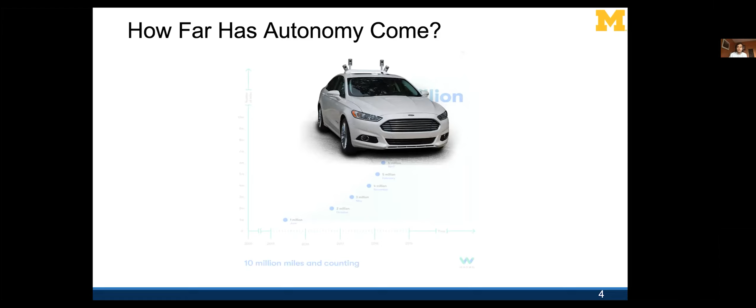And really, the goal of this talk is to develop sort of control mechanisms or an idea of how to control these systems that doesn't just work for autonomous vehicles, but can generalize across a bunch of different systems like walking robots or quadrotors or an arm robot.

And to try to understand just why this problem is difficult, that is controlling these types of systems, one way to think about it is thinking about how a researcher or even someone like Waymo thinks about doing planning and control for these types of systems. So one way to visualize that is, I have my car here, and we'll sort of see this picture maybe over and over as we go along the talk. We have our car here, and we may have an obstacle.

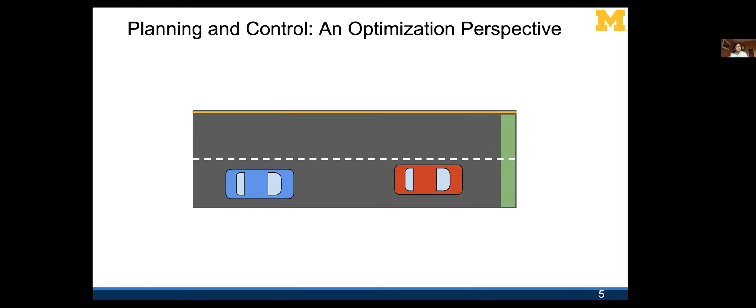And if we wanted to try to do receding horizon real-time control for this blue car here, well, the way that this is typically done is that people discretize time and they generate a trajectory by using some type of optimization, which discretizes time and then uses a discretized dynamics while doing optimization in order to generate a safe trajectory. And the challenge here is that may generate a trajectory like this. And the question is, does that actually represent reality?

And so there's some fundamental trade-off between model accuracy or optimization fidelity versus what we're able to realize in reality. And that trade-off is something that as autonomous vehicle engineers or as roboticists controlling general systems, we're uncomfortable with, and we want to see if we can develop a way to overcome that challenge.

Typically, sitting on top of all of this is the challenge of model fidelity. So, in addition to representing the dynamics of the vehicle with a high quality discretization, we also have challenges associated with, for example, in the vehicle context, representing friction or representing different types of scenarios and having a model of the vehicle itself that is accurate.

And so what this talk is really going to be about is trying to address this triumvirate of challenges by using infinite dimensional representations. And what this is going to do is allow us to transform nonlinear models into linear ones. And the challenge, at least in this talk, that we're going to try to address is how we can utilize these linear models in infinite dimensions in a way that is actually accessible to doing real-time planning without sacrificing performance or safety.

And the first portion of this talk is going to be some work that we've done recently that's called Reachability-based Trajectory Design. And it can make a nice trade-off between performance and safety where we don't have to sacrifice either of those things while being able to do real-time planning. And that's going to allow us to do autonomous control of a bunch of different systems.

And on the other side, we're going to talk about some work that we've done in the soft robot world, which is using another type of infinite dimensional representation of dynamics that's based on the Koopman operator. And that's going to allow us to control soft robots and actually allow us to do things that people in the literature haven't been able to do with soft robots to date.

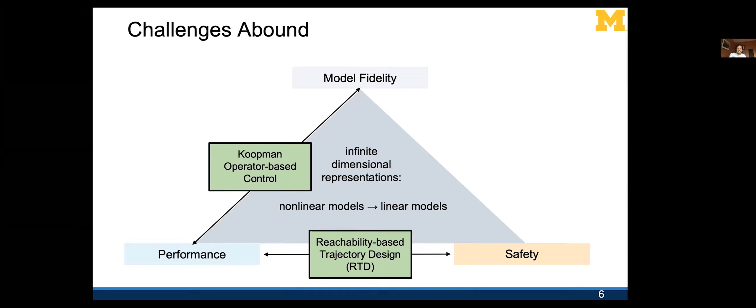And so it'll turn out, and as I warned Sam, I have a lot of slides. Chances are I won't be able to get through all of them, and I apologize in advance.

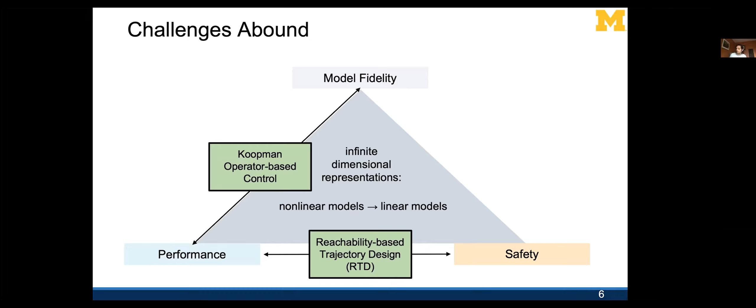So I thought I would just front load the talk with a few videos illustrating how these different algorithms work. So the first portion of my talk is going to be about this RTD algorithm. So let me walk you through how that looks on a bunch of different examples. So we're going to see these videos a few times here.

So on the left-hand side, you're going to see a robot planning view, bottom camera on the robot. On the right, you're going to see a real-world scenario. And this is in my lab when we used to have a lab before COVID. And on the left, what you're going to see is a bunch of waypoints that are essentially generated by some high-level planner. And we're going to have these obstacles, which are represented or detected by the vehicle at runtime using a planar LiDAR, that are being drawn in red. Our robot's footprint is going to be in blue.

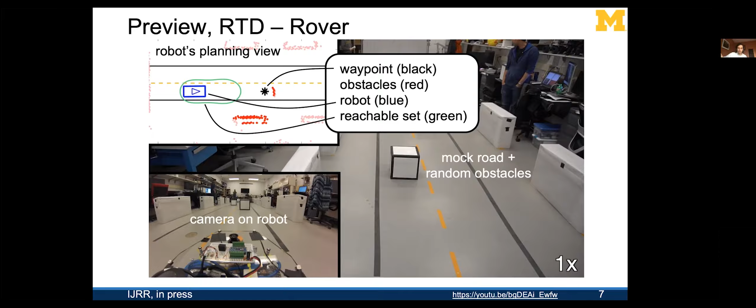And we're going to generate these reachable sets that are going to be control parameterized. And they're going to be basically selected at runtime. And we're actually going to be doing optimization to select that reachable set at runtime in order to reach that waypoint. And I'll describe how that algorithm works as we go through the talk. But this is what it looks like, at least while running on our robot here. And again, if you'd like the sort of unfiltered video with it moving nicely, go ahead and take a look at that YouTube link down there.

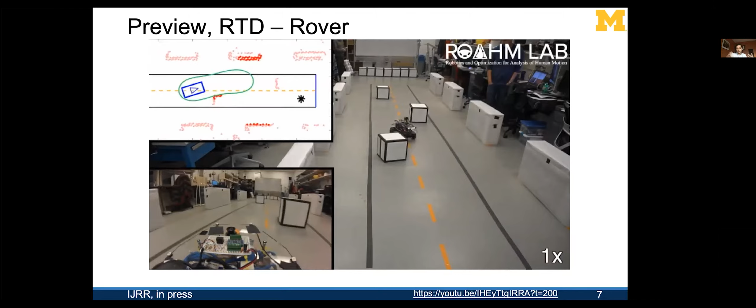But the cool thing here is that it's all happening on board the platform. It's all happening in a receding horizon way, and it can deal with these types of environmental situations without any difficulty. The interesting thing is we've actually extended this work to a bunch of different platforms. So this is a collaboration with the University of Sydney, where we're essentially running a taxi service for them.

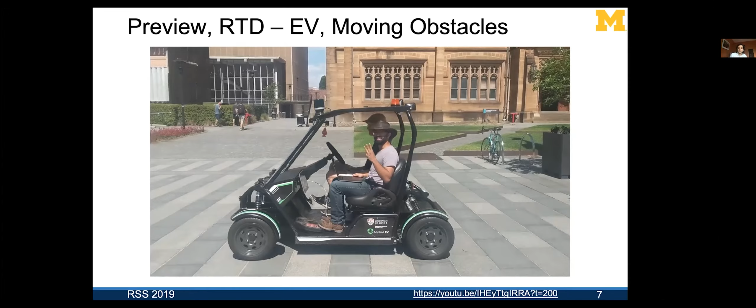And here we have our vehicle platform. It's an electric vehicle platform that's operating on their campus. And it's actually going from point A to point B and actually avoiding people and doing real-time planning here. And we can say nice things about the safety of this platform. Again, you can check out the YouTube link down here.

The cool thing is this algorithm doesn't just work for these vehicle platforms. It can actually work for quadrotors. And that's actually what I'm going to show next. Ooh. And here we go. So there's a quadrotor. And again, this is now doing this type of trajectory design. You'll see the quadrotor in a second.

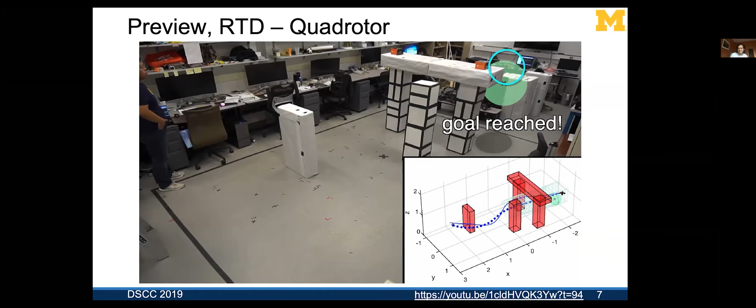It's over here. And you're going to see us doing the optimization on board that quadrotor platform in real time. Can't go much faster than about 1 meter per second in this space because of the size of the lab. But you're going to be able to see fun things happening here where we can even accommodate things like moving obstacles. And I'll jump to the end to show what that looks like here. In this instance, we're just receiving predictions of what pedestrians are doing, but we can accommodate those predictions and still say something about the safety of this quadrotor.

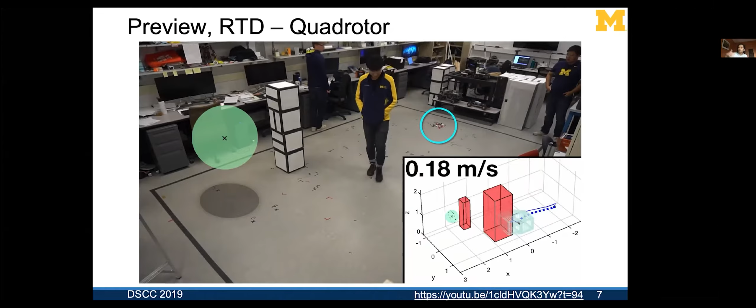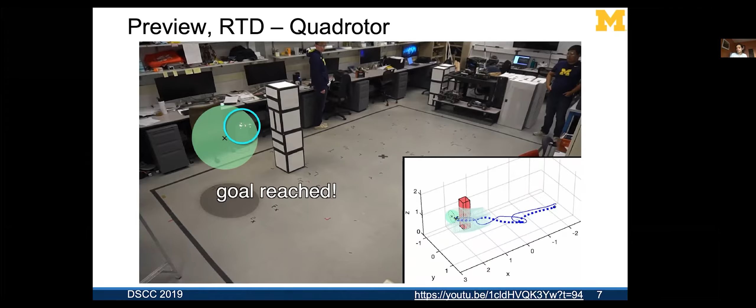And again, it's doing receding horizon planning with an optimization algorithm running on board the platform where we can say something about the safety of this platform. And it can accommodate things like aerodynamic effects, et cetera, inside of its reachable set while doing planning. The cool thing is when most people see this kind of reachable set stuff, they say, well, look, this works really well for low dimensional models. What about more realistic models?

Here's an example of us doing the same type of thing with a 7DOF arm. So this is a 14-dimensional state space model. We're generating, in this context, reachable sets that are constructed online. And actually, this is going to be what I'll speak about most of the talk. And again, we're doing planning through these really complicated scenarios for manipulators because these obstacles are very thin, which tends to be a problem for most optimization-based control design algorithms.

The cool thing is, and hopefully we'll see it, this can, again, do receding horizon planning. It's a dynamic obstacle that's just detected at runtime. And you'll see that we're able to nicely avoid that. And the amazing thing is that the same strategy extends to even higher dimensional robots.

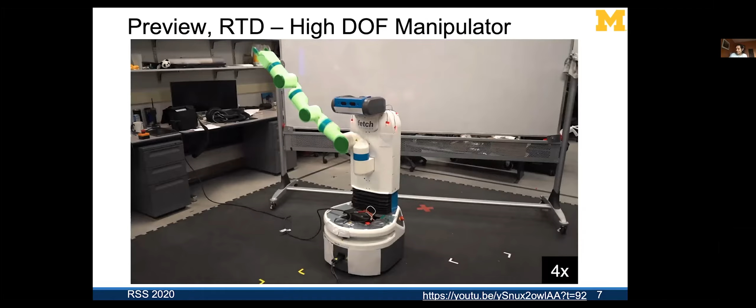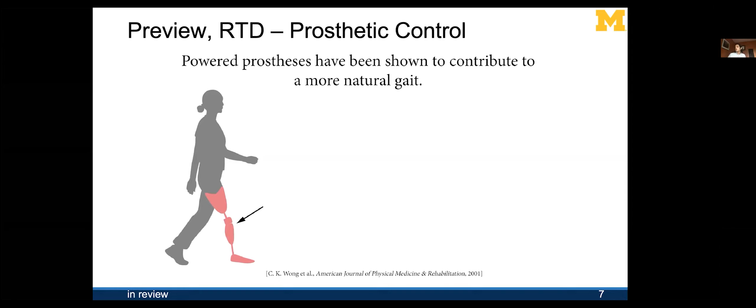Can you guys hear the volume here or no? Sam, yes, no, okay.

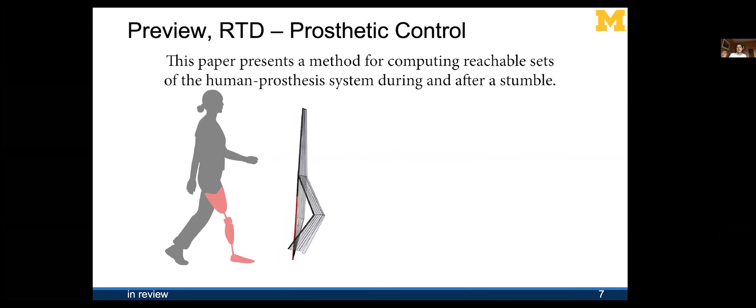So what this work is doing is actually doing prosthetic control, but now we have a set of predictions of what a human is going to do after a stumble occurs. And we can take that entire set of predictions and actually generate an input for the prosthetic that can accommodate that set of behaviors and still ensure the safety of the prosthetic and the intact human side while doing real-time planning by using a reachable set. So that'll be the first portion of my talk.

The second portion of my talk will be about this sort of Koopman-based control. And in fact, that Koopman-based control has allowed us to do really cool stuff with manipulation-based control. And this is a data-driven method. And the really amazing thing is that this is the first example of a soft pick-and-place robot that can actually pick stuff up, figure out its weight, and actually place it into the right bin. And it turns out that we're doing, again, all the control, everything online for this platform.

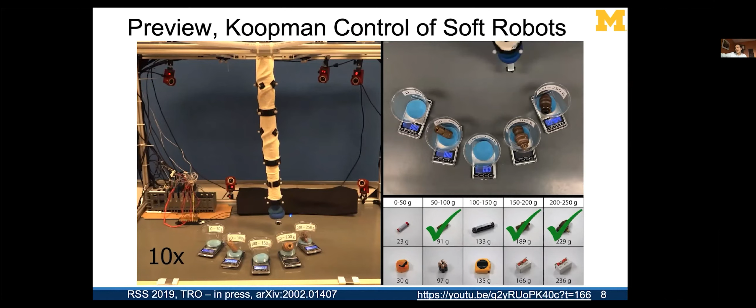And it's essentially figuring out what the weight of these things are. It's never seen these objects before. And it's essentially able to place them into the right bin, associated with their weight. So that'll be sort of the two things that I'll speak about. Chances are I'll probably only get to speak about the first thing because I have way too many slides. But if you're interested, happy to stick around and talk about the second thing, which is really interesting and associated with a lot of things that are going on at UW at the moment.

So reachability-based trajectory design. And what I'm going to do is focus on the context of manipulator-based planning, although this method extends to a bunch of different types of planning algorithms or platforms. So typically, when people are thinking about planning or control for autonomous systems, they usually divide the planning and control into a hierarchy. In the top level, there's sort of this Google Map style planner that's generating turn-by-turn instructions of, how do I get from Ann Arbor to the University of Washington? Well, first step is to get on I-94 and drive, right?

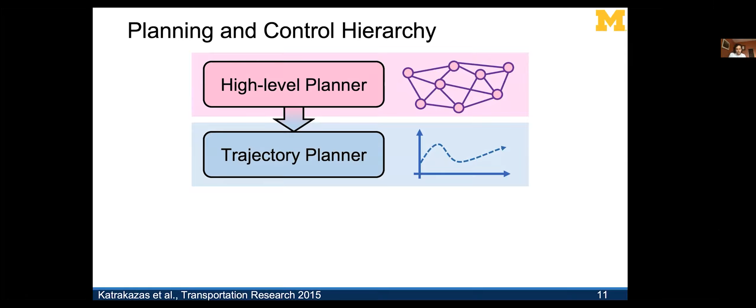The mid-level, there's this thing called the trajectory planner. What the trajectory planner tries to do is to follow those turn-by-turn instructions. Eventually, that information is passed to a tracking controller, and that tracking controller may have a model of the entire powertrain, whatnot. And what that's trying to do is to basically track the trajectory that's been generated as best as possible. Usually people do this sort of division of labor because it's really hard to do useful planning over really long horizons when you have models that are extraordinarily complex.

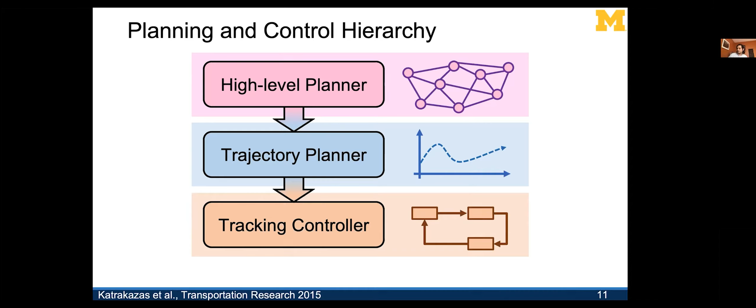And so by breaking it into these different pieces, you can break the problem over different horizons into different model fidelities. So the high-level planner can have a really simple model, the trajectory planner can have a medium complexity model, and the tracking controller can have a really complex model. The problem is that ensuring safety in this context really means accommodating all of the potential errors that can be created as you go down this hierarchy. And so people have thought about how do you ensure safety in this context, and usually the way that they do it is by trying to ensure some level of safety in the tracking controller.

And what that means in practice is that people have thought about developing a variety of different algorithms that can introduce safety at this level by doing some sort of validation. Traditionally, this has been done by essentially just doing some sort of collision check. And the challenge here is, I may generate a trajectory that's discretized in time, and I may try to follow that using my tracking controller. How do I ensure that that continuum, that is that entire trajectory, doesn't actually collide with some obstacle?

Well, the first set of methods are called these check methods. And what they do typically is just, I have a precomputed trajectory. I'm just going to verify at runtime that this particular precomputed trajectory doesn't collide with anything. These methods don't actually do any real-time planning.

They just are doing verification after the fact. Second class of methods, which I'm going to call correct methods, basically take a particular trajectory and try to modify it. Essentially, they try to modify the control input that's applied to track that trajectory in order to ensure safety. Actually, there's been a variety of methods to do this that have been presented. Reference governors, if you've been following the literature for a while, have been a very popular method for doing this type of stuff.

Recently, control barrier functions, and I think you're going to have Aaron Ames come and speak. He'll probably talk about this. It's really cool stuff. You get it working for a variety of different systems. And then the last set of algorithms are these things called FaSTrack. Again, these are all sort of the same philosophy. They think about trajectory planning and control in slightly different ways.

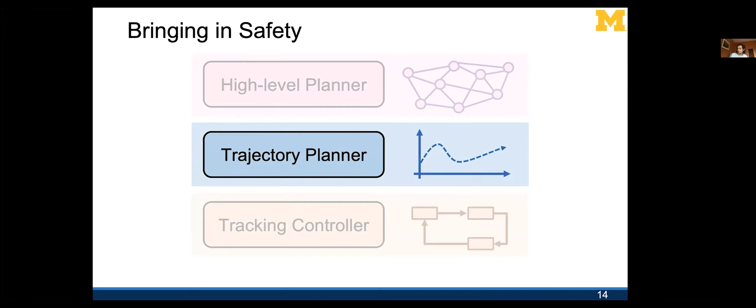So more recently, lots of people have been thinking about bringing in safety at the trajectory planner level. And in fact, there's been two methods. The first is these funnel library methods that, again, you had Russ in here a while ago, but his student Ani Majumdar, who's now a professor at Princeton, has developed. These methods are really cool, but the way that they work is by discretizing and having a finite set of trajectories, and you select between them. And essentially, the collision check is by just looking at discretized time instances, and that can sacrifice some notion of safety.

What we're going to talk about here is reachability-based trajectory design, which is an algorithm my students and I have developed. It can actually operate over a continuum of parameters or a continuum of trajectories rather than just a finite number. And we actually have a way to ensure safety over all time, not just at finite instances in time. And the really cool thing is we figured out a way to extend it to higher dimensional models in a really nice way, which is what I'll talk about today. So how does it work?

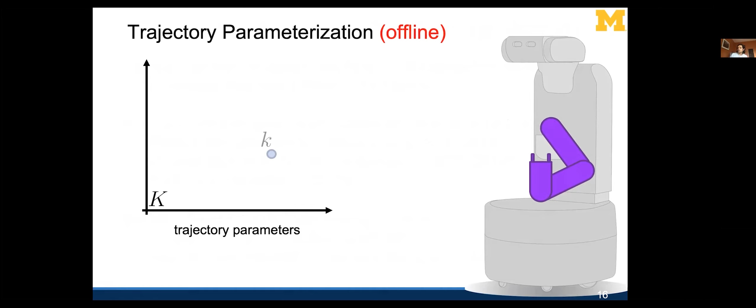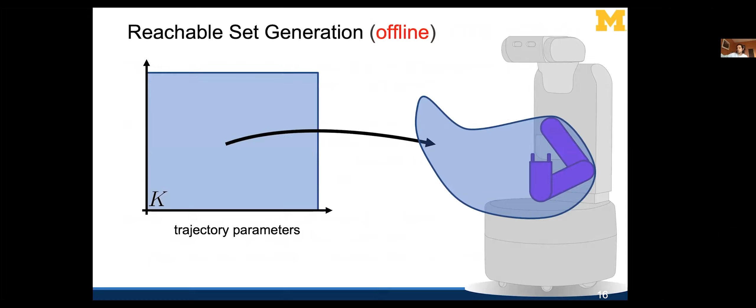Let's look at this Fetch robot on the right-hand side. What we're going to do is introduce a set of trajectory parameters for the Fetch robot. Those trajectory parameters are essentially going to describe different possible motions for the arm. We then think about a continuum of trajectory parameters, and that's going to be associated with a continuum of different behaviors in the workspace of the robot. In fact, we're going to pre-compute this reachable set. And then at runtime, we'll have an obstacle that appears.

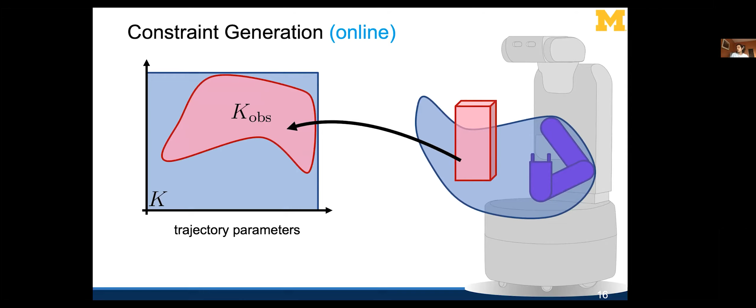The two takeaway messages here are we can do it for high degree of freedom robots, and we're generating a reachable set for a continuum of trajectory parameters. This is done offline. And online, we can do obstacle discretization for real-time validation, and I'll describe what that means as we go through the talk. So let's talk about the theory of how this works. Again, I'm going to focus on the manipulator model.

If you take a look at the papers that I mentioned earlier in the talk, we've actually extended it to a bunch of different systems, but the manipulator models allow us to talk about how to extend these ideas to higher dimensional systems.

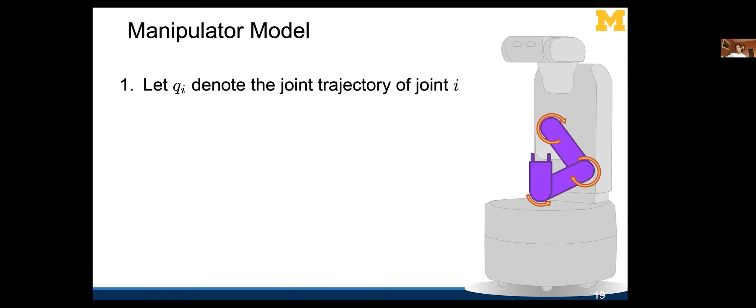So to do that, we're going to start off with a few assumptions. We'll assume that we have a bunch of joints here, and each of the joints is going to have some actuation associated with it. We'll denote the trajectory of joint i by q_i, and we'll write down the equations of motion as follows. For the sake of simplicity in this talk, I'm going to make two assumptions. It'll turn out those two assumptions can be removed in general, but it'll simplify exposition here.

The first assumption I'm going to make is that all joints are revolute. It'll just allow us to write down some matrices in a nice way, but in fact, that isn't a strict requirement. The second assumption is that the model is fully actuated. As I showed earlier, we've gotten this working on walking models that are actually under-actuated, so this technique can extend. But we'll focus on the fully actuated case.

The really important thing is that if the model is fully actuated, that allows us to track an arbitrary trajectory with a bounded tracking error by using something like feedback linearization. And in practice, if we start at the same initial velocity as the desired trajectory that we want to follow, then as long as we satisfy actuation limits, we can track that arbitrary trajectory perfectly well. That is assuming that we have a model that is perfect.

So what we're going to do now is talk about how we parameterize trajectories of this arm. We're going to make one assumption: that one of the trajectory parameters corresponds to the initial velocity of the arm. The reason that is useful is, if I know the initial velocity of the arm at a particular runtime, and I have a desired trajectory that matches up with that initial velocity, then as long as I satisfy actuation limits, I can track arbitrary trajectories by using something like feedback linearization.

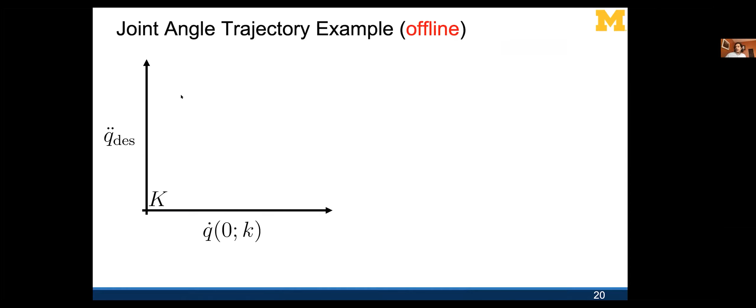The rest of the trajectory parameters can be arbitrary. In this instance, I'm describing it as some sort of velocity, or acceleration, but in fact it could be anything, as long as I have this joint velocity at time 0 as part of my trajectory parameter space. So for example, my joint trajectories could look like this. I start off at some initial joint velocity, go up to some peak, and then come back down. As long as I have this initial velocity at time 0 as one of my trajectory parameters, it's totally fine.

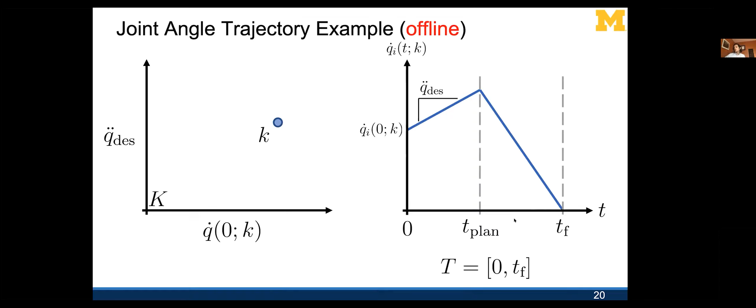All of my trajectories are going to be defined over some finite time interval from 0 to T_F. In this instance, because I chose this joint trajectory parameterization, it would describe, for example, the acceleration here. Since we're interested in receding horizon planning, we'll assume that we have a finite amount of time, T_plan, to plan. In practice, the robot must find a new plan within time T_plan. Otherwise, it continues executing its previous plan.

That's why we've brought our plan eventually to a stop here, because we want to make sure that if we can't find a new plan, we eventually bring our arm to a stop so that we don't keep moving beyond the time over which we've done verified planning. The last assumption is that the trajectories begin at q equals 0 without any loss of generality. You can just shift your coordinate systems as needed to satisfy this assumption.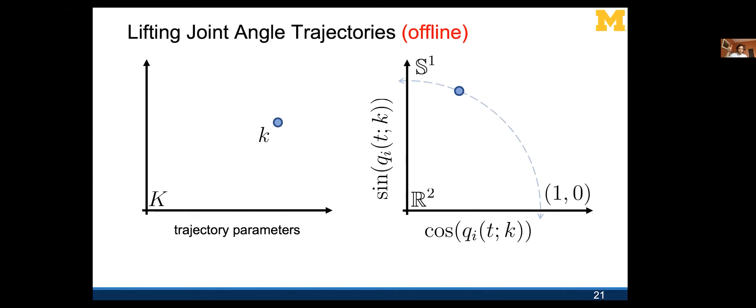And in fact, in practice, if I have a family of trajectory parameters on the left-hand side, well, that's going to correspond to a family of trajectories on the circle. Okay, so I've basically taken my dynamics, which are Q, and basically lifted it by looking at the function evaluation of cosine and sine on these trajectories.

What that's going to allow me to do is now consider the joint reachable set of the system as a function of the trajectory parameters. And what that's going to look like is a subset of R2 cross K. I can think of this as S1 cross K if I'd like, but it'll turn out we're generating outer approximations eventually, and they'll actually belong to R2 in that case.

So what we're going to do is define this joint reachable set object. And the joint reachable set is going to be defined as me taking my joint trajectories as a function of K, taking the cosine and sine of them, and making sure that the derivatives of them as functions of time obey the parameterization. Okay, so this set Ji is essentially going to describe the sine and cosine evolution of my joint trajectory as a function of time.

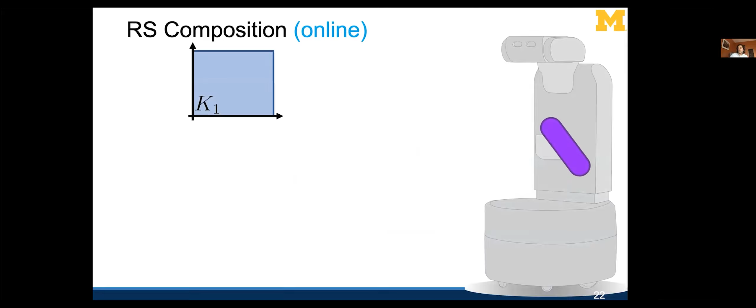Now, that's really great. Hopefully, you're sort of seeing where that could potentially be useful. But in practice, we're going to have several different joints. And the important thing here is that I can actually do the same type of computation for each of the joints inside of my robot.

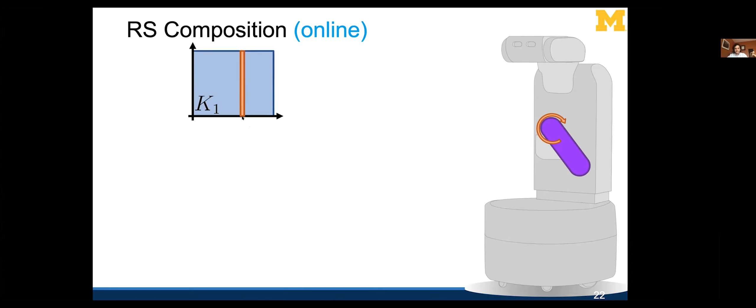But in particular, if I know what the initial velocity is at a particular instance in time, what I can do is look at a slice of this trajectory parameter space corresponding to that particular joint velocity at the initial time. And what I can then do is carve out the workspace of the robot across the remainder of the space. And in fact, I can do that for each of the different joints and describe the workspace associated with each of those different joints. And in fact, I can draw out this really beautiful sort of object in the workspace of the robot.

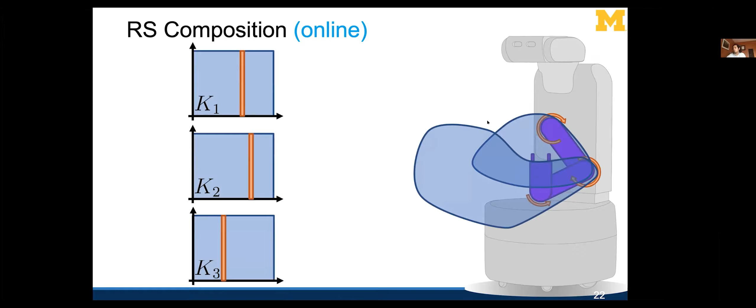The important thing, though, and we'll call this operation of specifying the initial condition slicing, we'll call the operation of stacking up all of these joints together stacking. And the important takeaway, and what we're going to talk about next, is that by slicing and stacking these simple joint reachable sets, we can actually construct a high-dimensional reachable set of the entire arm.

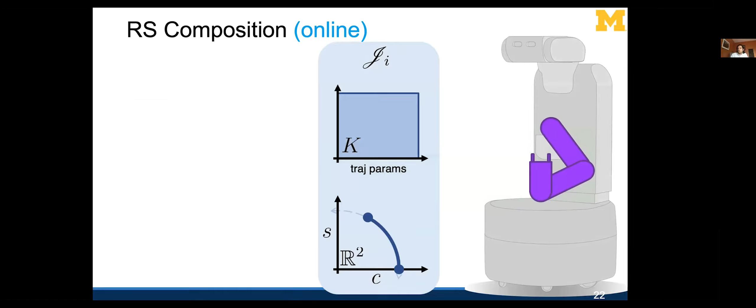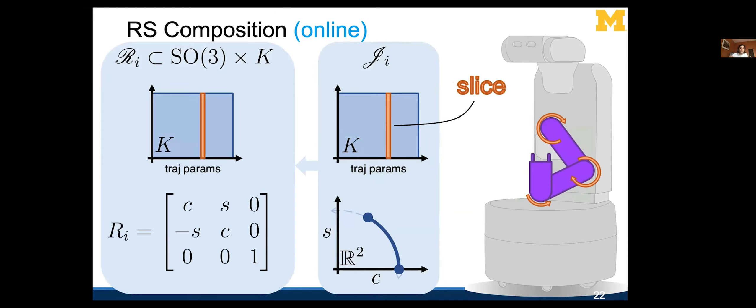So in fact, if I have the first joint, Ji, well, what I can do is I can slice in the initial velocity of that particular joint, and then I can generate a rotation matrix associated with that particular joint reachable set as a function of time. And in fact, what I can do then is if I slice, I can multiply that by the link volume, and I can actually get a parameterized swept volume that describes the workspace representation of that link while it's following this set of trajectory parameters with this initial velocity sliced in.

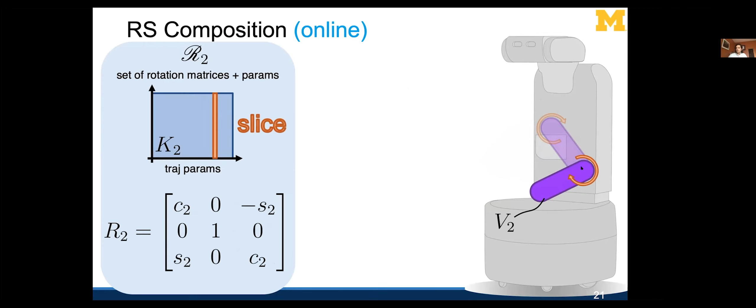Now, I can try to repeat that same exercise with the second joint. Again, I have my trajectory parameterization, and suppose my rotation matrix looked like this for this particular joint. Well, now I can slice in the initial velocity of this joint, and then I would have sort of R2 times V2, which would describe the swept volume of this particular volume as a function of these trajectory parameters.

But the challenge is that I'm missing the translation due to the first link, and I'm missing the rotation due to the first joint. Well, the important thing is now I can actually recreate that by essentially first getting to the joint location of the origin of the second link, and then actually bringing in the parameterized sort of joint location, and then multiplying by the swept volume of the second rotation matrix.

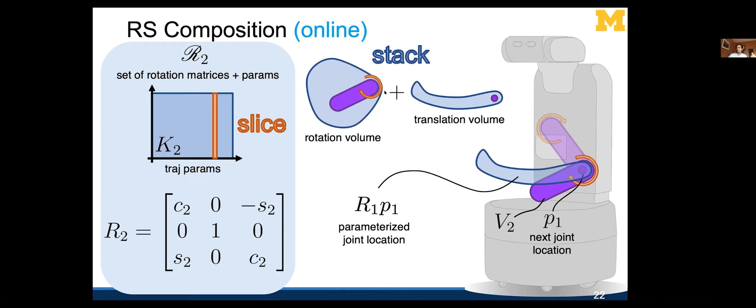What that means in practice is that I'm going to have a translation associated with the end effector of the first link, added together with the rotation volume of the second link. And in fact, I can represent that in a really nice way by looking at this operation here, R1 times R2 times V2, plus R1 times P1, where P1 is the end effector of the first link.

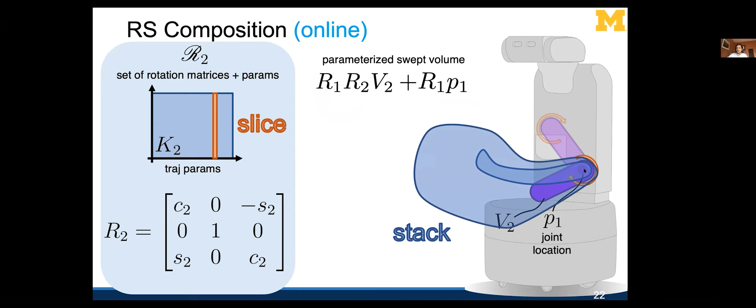And in fact, what that allows me to do is essentially stack to get the swept volume of the second link, and slice to get the initial velocity and associated parameterization of the rotation matrices of the associated links along the way. And I can repeat that operation as I go down the link arm. And what that allows me to do is essentially account for the initial joint angles and velocities by using stacking.

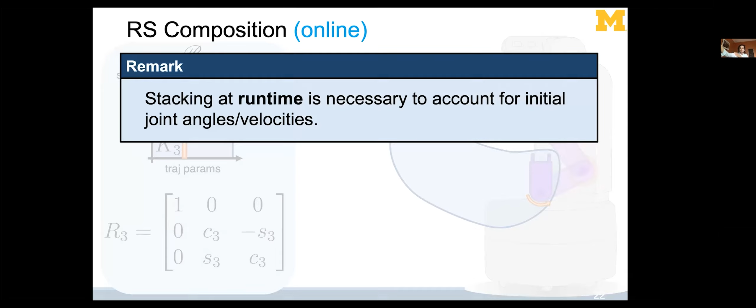And then I can compose these reachable sets together by using this stacking operation in order to actually get the entire swept volume of the arm as a function of this trajectory parameterization.

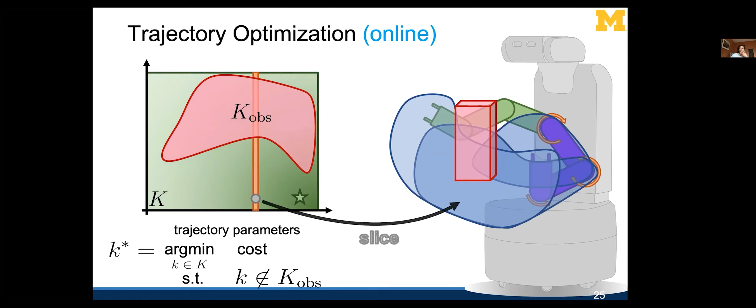What that means at runtime then is if I have this obstacle, I slice in my initial velocities, then I stack to get my entire swept volume as a function of those trajectory parameters. I have these obstacles, I can essentially intersect them with this swept volume and essentially identify a safe trajectory parameter that gets me as close to this goal as possible by performing some sort of optimization. And that's what I'm going to describe next.

Okay, so slicing and stacking allows me to generate a high-dimensional reachable set. But how do we compute those reachable sets? How do we implement stacking and slicing? And how do we generate the hard constraints that are associated with safety? That's what I'm going to talk about next.

But before I do that, any quick questions? Okay, I will take that silence as confusion.

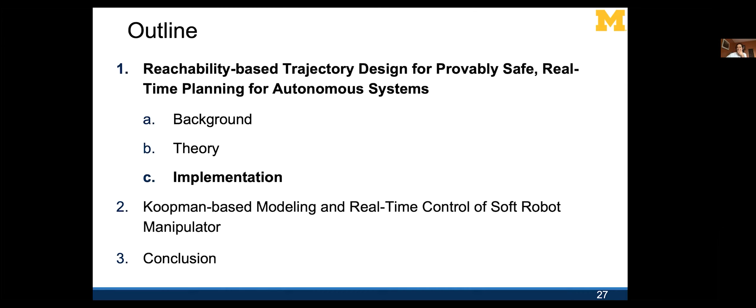Okay, so what we're going to do is generate these reachable sets for each of the joints using zonotopes. So if you've never seen a zonotope before, the zonotope can be described by a center, C, plus generators. And these generators can be just arbitrary vectors in Rn. And we can generate a zonotope by essentially allowing these generators to be multiplied by an interval. And by adding these things together, we essentially get these rectangular looking objects in Rn space.

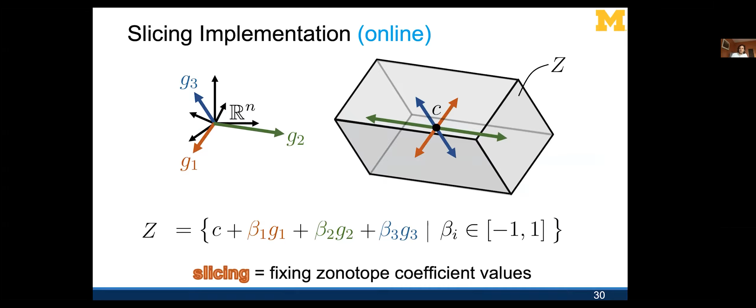So the next question is, how do we actually slice in at runtime? It'll turn out that slicing is no different than me fixing a particular zonotope coefficient to a particular value. So what that means in practice is that I would set a particular coefficient to a specific value, and I'm actually generating a slice of the zonotope here. And in fact, at runtime, if I fix a particular zonotope coefficient, it corresponds to us fixing a particular initial velocity. Okay, and so in practice, if I fix that initial velocity, that's going to correspond to me selecting out a specific slice of these zonotopes as functions of time.

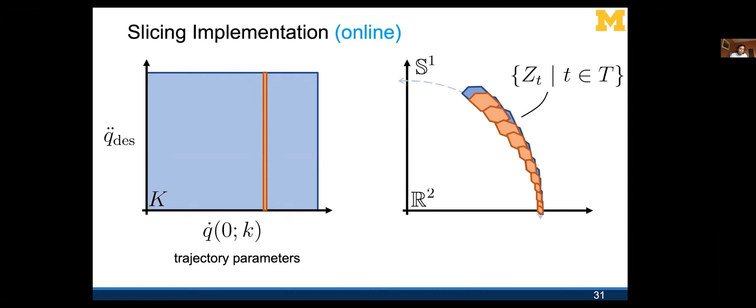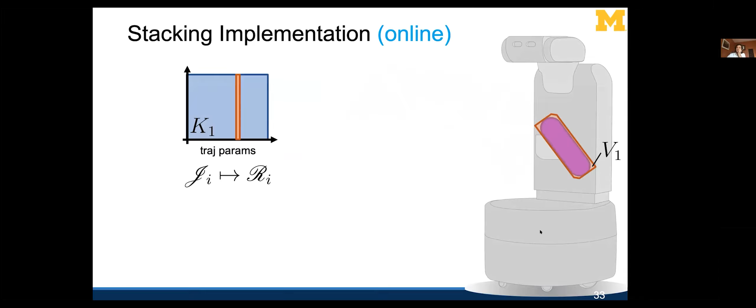The cool thing is, I can essentially do the same thing to generate matrix zonotopes, where now, instead of having these objects in Rn, I can allow these Gs and Cs to be matrices. So in practice, if I select a particular slice here and I have a link volume V1, I can take the joint reachable set and treat it as one of these rotation matrices by simply transforming the zonotope into a matrix zonotope, just reshaping the joint reachable set into the associated rotation matrix.

In fact, what that would mean in practice is that if I then multiply that matrix by the link volume, I'm actually getting out the swept volume as a function of time. The cool thing is you can actually prove that these matrix zonotopes for each link over-approximate the rotation matrix set. Okay, so if you have that joint reachable set that's an outer approximation, you can get the similar property for these matrix zonotopes.

So now in practice, if I have a particular end effector location, I can figure out what that end effector location is as a function of the particular trajectory parameters that I've chosen as a function of time by applying this matrix zonotope operation to the end effector of that first link. That allows us to get the translation, which allows us to describe the beginning of the second link by using the first link's end.

In fact, we can repeat that same operation to construct the swept volume representation for the second link by just doing this type of matrix arithmetic. So we have the rotation component and the translation component. We usually call these rotatotopes because we like fun names, right? And these fun names allow us to understand what these objects are actually representing in practice: the representation of the swept volume in the workspace of the robot.

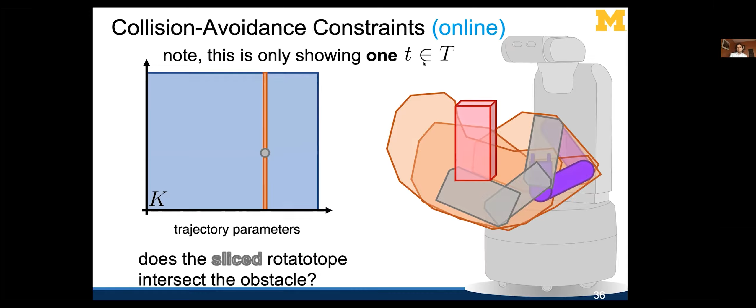The first step is I slice in my initial velocity. And then I have an associated set of possible things that the arm can do beginning from this initial velocity. Any value along this line here corresponds to potential things that the arm can do. I'm showing one potential thing that the arm could do at a particular instance in time. And now, if I want to ensure that I'm safe or detect if I've collided with anything, I just need to do zonotope intersection if my obstacles are represented as zonotopes.

In order to do that, you need to understand how zonotope intersection works. It turns out that two zonotopes have non-trivial intersection if you can describe the center of one as being inside of this new zonotope that's been created. So that is Z2 with the Minkowski sum of the generator of the first zonotope.

So what does that look like in practice? If I call this one Z1 and this one Z2, what I can do is take the generators associated with Z1 and add them to the other zonotope and see if the center of the first zonotope actually belongs to this new zonotope that I've constructed via Minkowski summing. And in fact, that operation can be described in a really nice way as the max of a set of linear constraints, and that's what I'm going to show next.

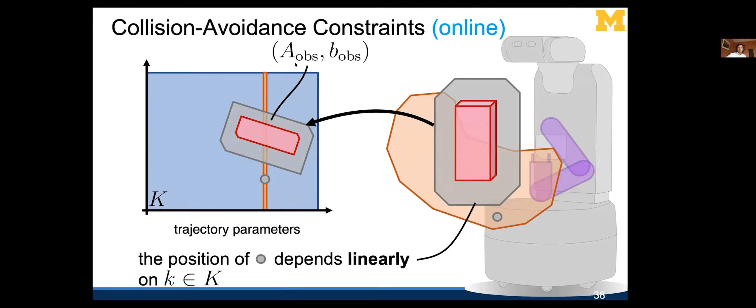So, see this. I can actually represent this zonotope over here, the one in gray, as a linear constraint. And in fact, I can describe collision avoidance over the max of a set of linear constraints. So if the max over a set of linear constraints is greater than 0, then this trajectory parameter is safe. And the cool thing then is that I can write down this optimization problem as just the following.

So I'm minimizing over some cost function that's a function of my trajectory parameters, and I'm ensuring that I satisfy this max constraint written down here. And the impressive thing is that this can be cascaded to build out a full arm, and this can allow us to do really nice optimization at runtime.

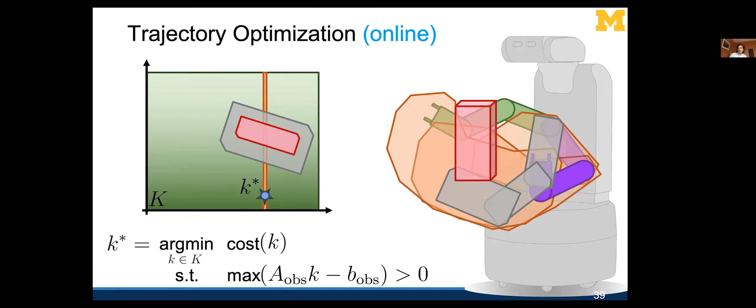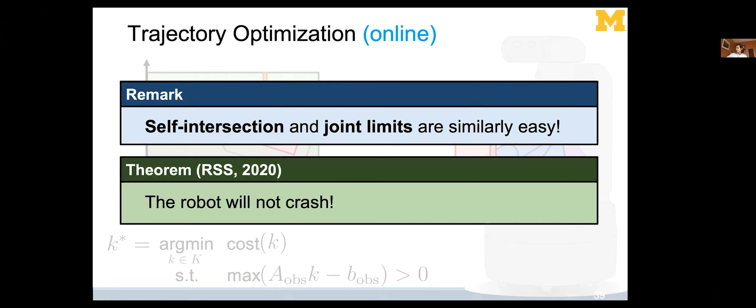I haven't described how self-intersection and joint limits work, but in fact, they can be described in a similar form. Take a look at this RSS paper, and it'll walk you through all the details of doing that. But it's even simpler than the Minkowski sum style of operation that I've described thus far.

So in fact, we've done this on a bunch of different platforms. I was showing some at the beginning, but here's another example on an arm. Here, the goal is to get this Fetch arm to the top. Note that this is usually really hard for planning algorithms because this obstacle here, which is the table, is really small. So it tends to be really hard to actually do planning through this type of obstacle. You're going to see, and I'll pull this up.

OK, so what we're doing here is we have this goal configuration up here. In black, eventually, you're going to start seeing the high-level planner, which is an RRT in this instance, generate plans or waypoints that are in collision repeatedly. Nevertheless, this zonotope construction is going to be able to find a way to navigate its way out of these in-collision configurations and get to this goal configuration.

So in black, you see some of these are in collision, but the arm is still figuring out, hey, I need to get to these waypoints, but not be in collision. And eventually, you're going to see that this arm is going to figure out its way to get over the top here.

OK, so this is done in 1x here, but all of our code is available here. Take a look. I mean, the optimization bit is actually running really quickly. It's the waypoints that are a bit of a problem here, and that's why it's taking a little bit longer than we'd like it to.

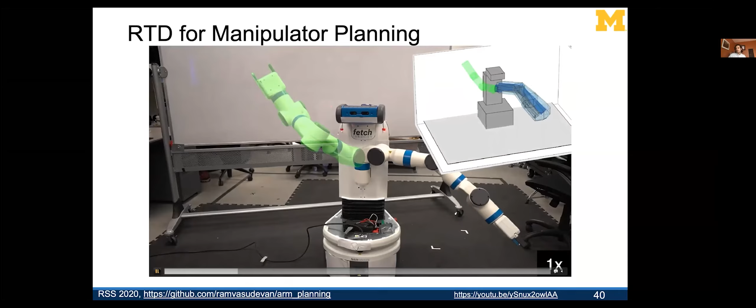But nevertheless, we'll see we've actually been able to do it for a bunch of different situations, like these sorts of situations where we have these sorts of dynamic obstacles appearing. And again, this is all happening in a receding horizon way. So it detects this obstacle, and then at runtime makes a plan to get around that obstacle.

As I mentioned, we've actually been able to do this for a variety of different platforms, mostly ground vehicles, but quadrotors as well, as I showed at the beginning of the talk, and more recently walking robots. And we've done a bunch of comparisons to lots of different algorithms here, like nonlinear model predictive control, just running RRT sort of naively, doing state lattices, doing linear MPC, doing FaSTrack, which was that sort of Hamilton-Jacobi-Bellman equation based approach, CHOMP, which is something that's been popularized by Sid Srinivasa.

And sort of consistently, our algorithm is usually able to get to goals, meaning get to desired locations at a clip that is better than or equal to its competitors. It's always safe, which is really important. And it's able to do it without being so conservative that it becomes cumbersome in reaching these goals. These are a bunch of different platforms here.

These are ground vehicles. This Fusion model is actually a really complex vehicle model that we have. We're working with Ford to actually put this algorithm on their self-driving cars. As I mentioned, recently we've actually been able to get this type of stuff working on Cassie, but it hasn't been published yet. So I won't talk too much about that other than showing that video.

And now I'm going to switch gears and start talking about Koopman-based control. But I realize that I'm already sort of at 2:15 here, or I should say 11:15. So maybe I can pause and take some questions and then maybe show some videos of how this Koopman-based stuff works and then stop there. So any questions about this sort of reachability-based trajectory design approach to planning?

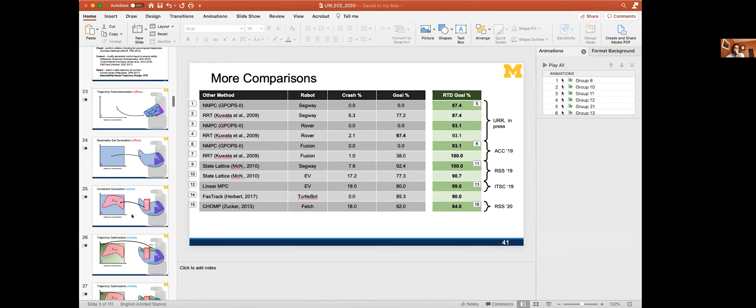Oh, good question. Okay. So a reachable set is basically going to correspond to, in this instance, and actually let me pull back here for a second. So let's take a look here. It's maybe a good slide to look at. So the reachable set in this instance is going to be essentially the set of cosines and sines as a function of a trajectory parameter that I am able to achieve while satisfying my dynamics at a particular instance in time. So in this instance, it's basically like things that can be reached by the dynamics at an instance in time and over the finite time interval that I'm considering. Hopefully that answers the question. Any other questions?

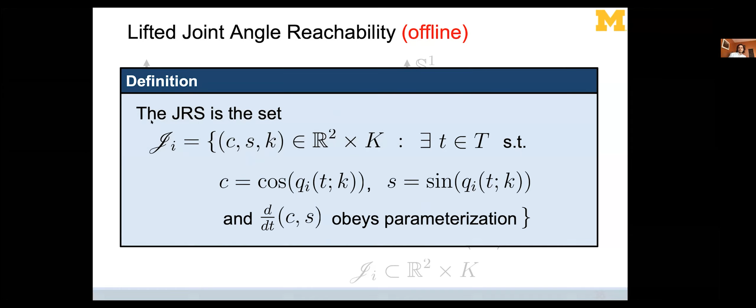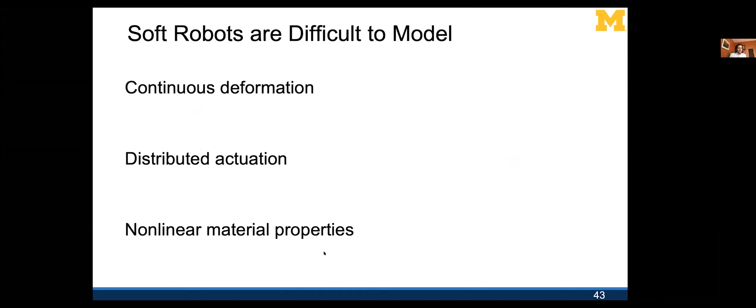Okay. If not, I can jump ahead to this Koopman stuff and sort of talk about it pretty quickly. The first thing to keep in mind is soft robots are extraordinarily difficult to model, and the challenges are because you get these sort of continuous deformations. They have distributed actuation. They have these nonlinear material properties. The good thing about soft robots is you can get hit by them and they don't really hurt that much. And the damage that they can cause is not so bad.

So this is my student Dan, who just finished his PhD and is working with Rob Wood now. The problem is that controlling these kinds of systems can be really hard. But the good news is they're fairly safe. Like you can have them run into things. They're not going to damage things.

They don't hurt if they hit you. I've been hit by them a bunch.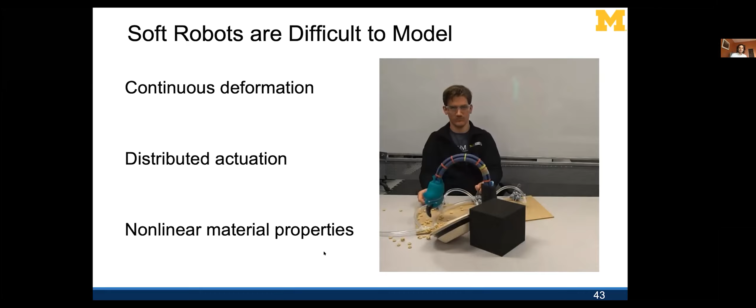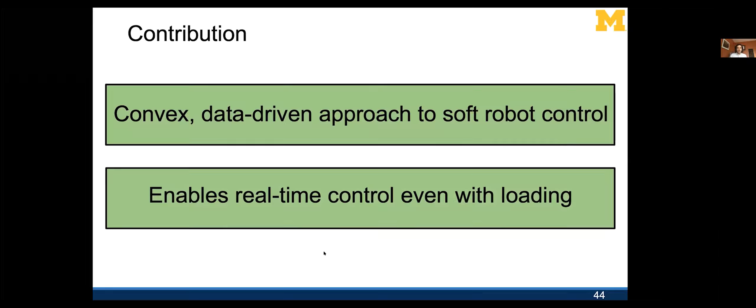It's not too bad. What I'm going to talk about in this section is this approach to doing data-driven sort of modeling, and that is going to allow us to do convex control. And in fact, we can actually do real-time control even with loading that's not necessarily built into the model while doing data collection.

The idea here is the same thing actually that we did earlier, which is we're going to do lifting here. And the idea for lifting is that if I have an original space down here, maybe I want to do something like classification. Well, down here, if I have these red points and blue points, it's pretty easy for me to run like an SVM and separate these two pieces of data.

On the other hand, if I have data that looks like this and I want to run a linear SVM, well, this data is in a circle, like this red stuff is in a circle, and finding a separating hyperplane that separates the red points from the blue points seems really hard. However, if I do this lift and I transform the data into this paraboloid shape, it's actually really easy to find a separating hyperplane, right?

And what we want to be able to do is the same thing to our dynamics. If we lift our dynamics here, maybe they look nonlinear down here. Can we lift them and make them look linear up here? Actually, that's what we did with the arm. So when I had that arm, the rotation matrices were actually really complicated looking. But in fact, by looking at the sines and cosines of them,

I actually was able to write down a linear time varying system. It turns out that linear time varying system, which I computed the joint reachable set for, was actually really nice for me to construct a Zonotope-based representation for its reachable set using CORA. So in fact, we're going to do the same type of trick here. We're going to use Koopman operators to do it.

And maybe someone has given a talk about this already at UW. I wouldn't be surprised, since Steve Brunton and others are there working on this kind of stuff.

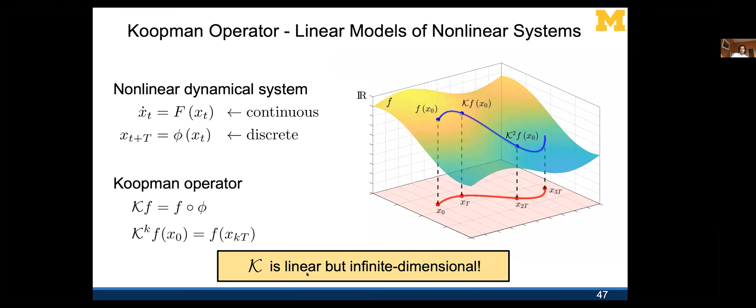And what that's going to allow us to do is essentially consider sort of this function space up here and consider the evolution of the evaluations of this function along trajectories of the system. And in fact, that Koopman operator, which I can construct on the left-hand side, is actually going to be linear, but infinite dimensional. The challenge is, of course, building a finite dimensional approximation that's good enough for you to actually be able to do control. And in fact, that's what this work is about.

And what we've been able to do is essentially construct these really nice representations for these Koopman operators. And in practice, we can build these sort of nice matrix representations for these Koopman operators as they act on function basis. And in fact, what we can do is apply linear regression to actually construct these Koopman operator approximations. And the way that we've done this is by basically appending the control input to our basis functions. And that will allow us to identify a Koopman operator by using just something like regression.

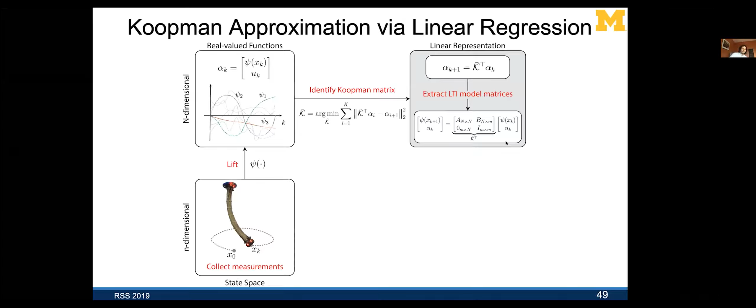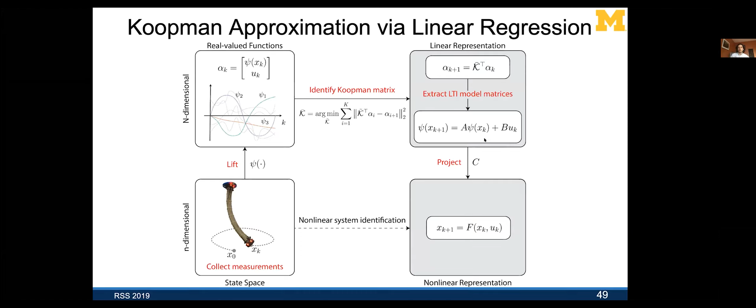And in fact, by doing this kind of appending, we can actually identify LTI models of these systems. And those LTI models are going to allow us to do real-time control. And in fact, what we've done in this RSS work is actually shown how to build sparse approximations to these A and B matrices that are going to allow us to do MPC-based control in real time for these soft robots. And in fact, we've applied it to a bunch of soft robot systems.

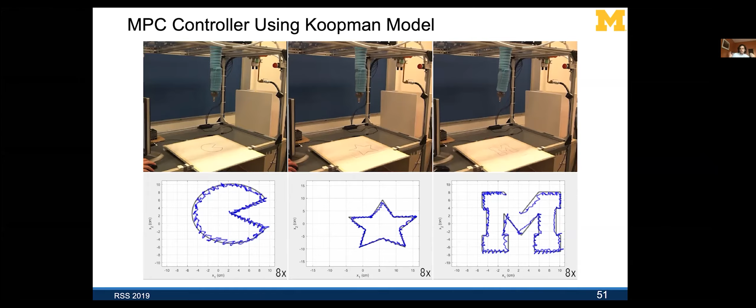This is sort of an illustration of how it looks. This is not using any model of the trajectory a priori. That is, it is identifying what trajectory it should follow at runtime using this Koopman operator-based representation. So the Koopman operator representation is not doing feedback about that trajectory. It's actually finding that trajectory at runtime. And in fact, we've done a bunch of different comparisons and whatnot.

And this is sort of how it looks. The really cool thing, as I mentioned, is you can actually extend this work to accommodate loading and lifting of objects and whatnot. And the way that's done is by simply adding the weighting as an additional lifting function. And in fact, that's going to allow us to do a Luenberger-style observer to actually identify what the weight is at the end effector at runtime, because everything is nice and linear.

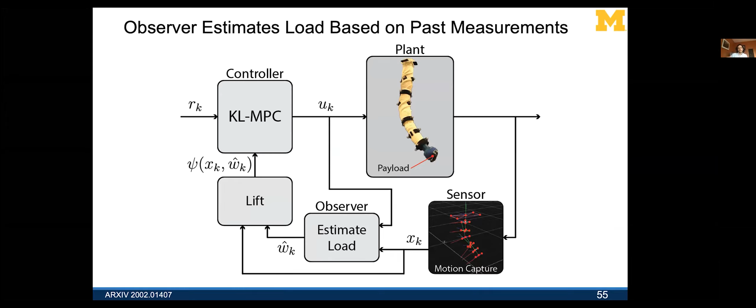And that has allowed us to actually build the first soft manipulator that can do pick and place in a really nice way. And again, the really cool thing here is we've identified the model using these data-driven techniques, using the same lifting philosophy that I applied in that RTD-style thinking, but now to actually doing Koopman operator-based control for these types of soft robots.

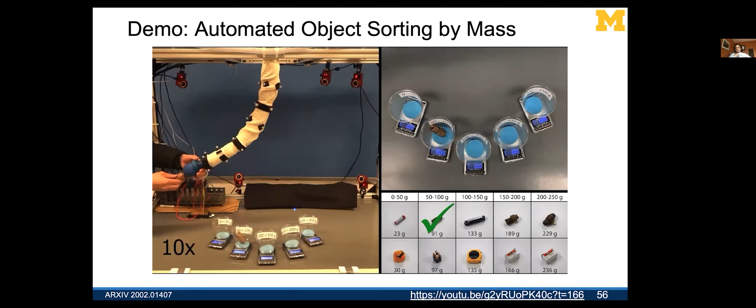And actually, we've gotten quite a bit further. This was at the beginning of the year. We've been able to do some fun stuff that hopefully you'll see some videos of soon, where we've been able to do things like throw objects and play catch with a dog. So in short, these are the two pieces of the talk here. These are the students who are actually doing all the hard work.

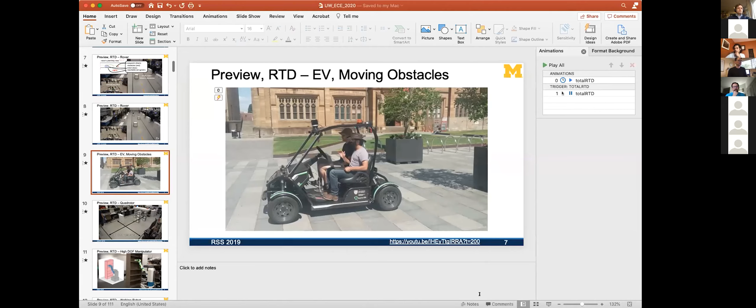So in these videos, let me pause here. These are multiple obstacles that are all treated independently. In practice, for the ground vehicle work, you don't actually need these obstacles to be represented as zonotopes. They can be arbitrary points. You can represent non-convex obstacles in the manipulator work as unions of zonotopes. None of that is a problem.

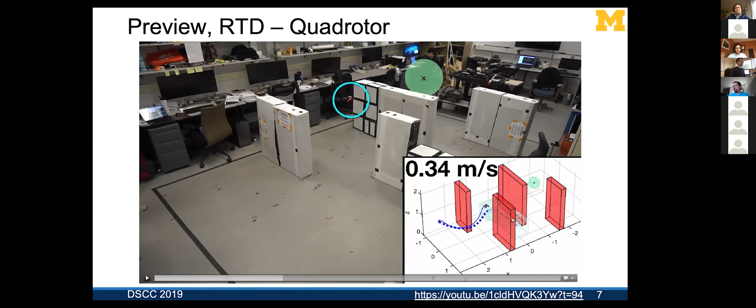And so that's all doable, and in fact is what we're doing in these examples, even in this quadrotor example. All these obstacles, like this one on the left-hand side and this one up here, are both being treated at the same time as obstacles that you need to grapple with. And in the manipulator work, it's actually thinking of all of these obstacles together at this instance while it's doing planning.

There's another question on the chat asking about justifying the choice of Koopman observables that you're using when you augment your state space. I'm interpreting that to mean, why did you choose those observables? What if you had chosen others? Yeah, that's a really good question.

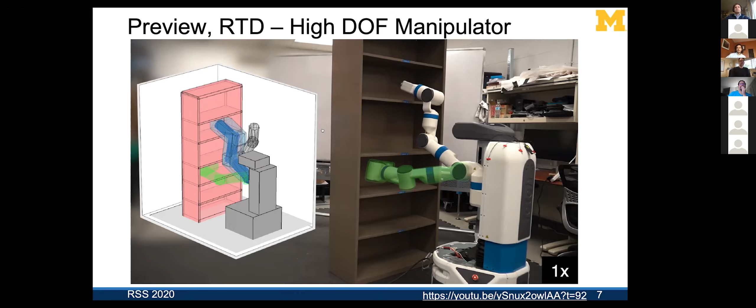I actually didn't even spell out what we're using as observables here, because it's fairly open for us. Let me step back here for a second. When we did the Koopman work, we've done it with a bunch of different basis functions: monomials, sinusoids, radial basis functions. Our code that's available can take all of those; whatever basis function you can think of, we have implemented. We're not really seeing that drastic of a difference between those different basis function representations.

What I will say is at the moment, these types of motions we're playing around with are fairly benign, meaning we're not really moving that fast. And so these, I will call them linear projections of the Koopman operator, they're okay. They do really well with respect to these tracking problems. But if we want to start doing more dynamic things like throwing, these linear projections tend not to be as good.

And so Dan and I have a recent paper on arXiv where we built a slightly different class of projections that's bilinear, and use those bilinear projections while still doing real-time control in a nice way. That has allowed us to do more interesting things in terms of being able to do dynamic things. The basis functions we've chosen have not been as serious of a problem for us as the types of projections we're considering of this Koopman operator.

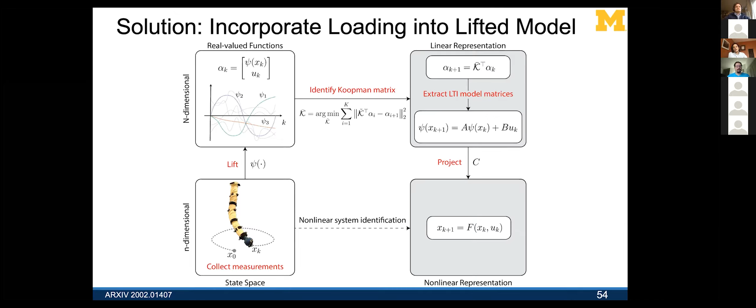And that's been the really exciting thing that I've been working on for the past several years: how do we build these outer approximative objects in useful ways? We've done that with a variety of different techniques. These zonotope ones are a nice way to do it for kinematic chains, but for ground vehicles and other systems, there are other ways to do it using semi-definite programming or other techniques.

So to answer Sam's second question about what classes do you take to be able to do this kind of stuff? You need a bunch of analysis and functional analysis and that kind of stuff. It's really helpful to understand how duality works and how function spaces work in order to richly think about some of these ideas. But at the same time, it's helpful to think about the numerical methods that people would need to be able to apply these types of algorithms.

So if you have a numerical methods course, or a course that teaches you about convex optimization, which I'm sure is a popular course at the University of Washington, semi-definite programming, these kinds of methods, though I didn't speak about it here, are really nice ways to build this type of relationship into an approximation scheme.